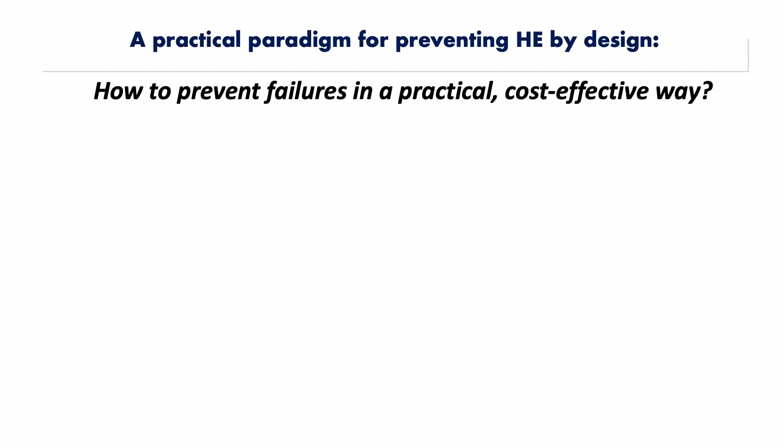And so this is a combination of a few different companies that have been working on this: US Corrosion Services, which I'm representing, and then also Schlumberger and Applied Fracture Mechanics. The point that I want to bring about today is how do we practically take what we're doing in academia and in research and apply it in a way that we can really fundamentally change the way that people are actually using materials. Okay, so I'm going to describe a paradigm and then also talk about what we're doing to implement that in the US.

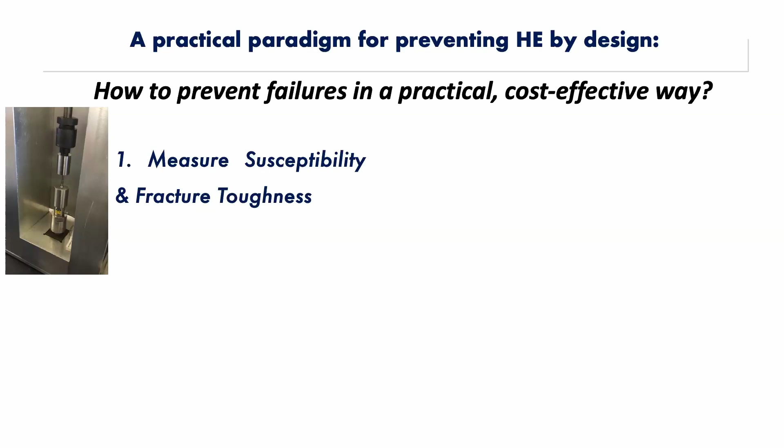So the first thing is measure and understand the susceptibility of your materials and understand the fracture toughness and use fracture toughness related techniques. The second thing is once you've done that, then you can select materials that you know are safe based on the testing that's been performed. And then the last thing, I love this one. This is from ChatGPT, this hilarious little guy.

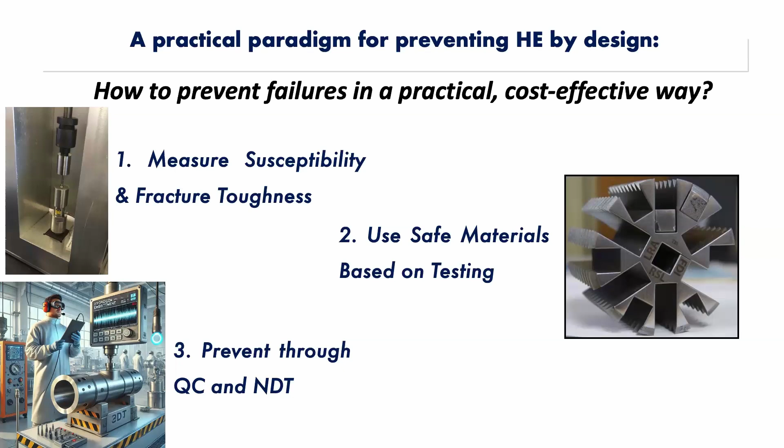And of course, they misspelled embrittlement, is to prevent problems by not only selecting materials that are good, but even when you select a material that you've tested and you know it's good, that doesn't prove that on a batch per batch basis it's good. So the next step is implementing quality control and potentially even non-destructive testing techniques that'll allow us to catch materials before they get out into service.

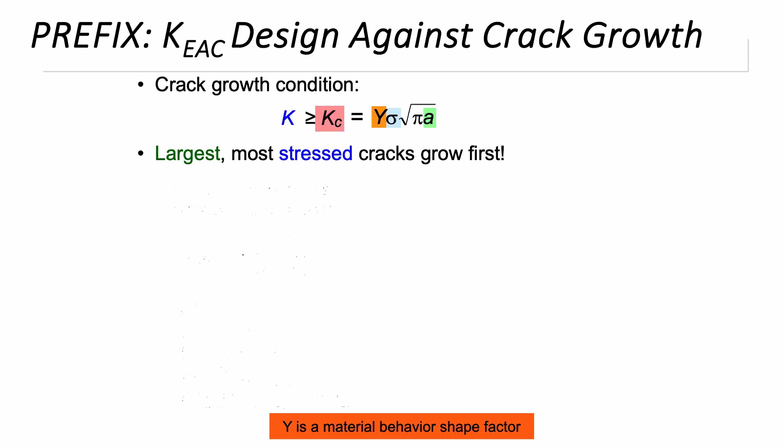So the fundamental idea that lies behind all of this is something that has been used in a lot of different industries, which is the idea of leaking before cracking. Because if you have a leak, you can safely go and prevent it. If you have a large crack that becomes catastrophic, that's when you have much more dangerous failures.

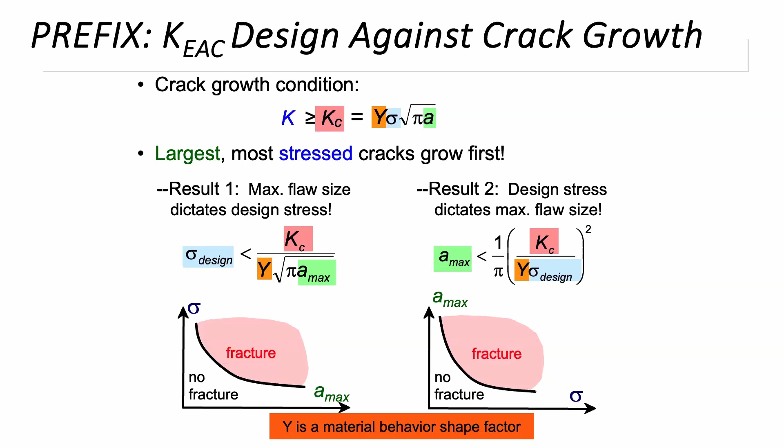Okay, so I'm not going to have time to go into all the details here, but if you're interested, I'm happy to talk about any of the details of these slides. I have 20 to get through in about 12 minutes, so I'm going to cruise pretty quickly through these. But this is the fundamental fracture mechanics that goes behind it to say how you design your materials and pick them so that they will leak instead of cracking.

Okay, and so this approach that we're using right now is similar to what's been used for sour service for a long time. So in the US, we started with MR0175, which is the materials requirement for sour service. That was implemented back in 1975 and then has been steadily added to over the years. And if you've seen it now, it's a massive document compared to back in the day when it only used to be a few pages long. But that's because we've implemented all of the learning and research that people have done in sour service.

And so what's happened is we developed test methods. Those test methods are required for batch testing of every batch of material that's going into critical sour service applications. And then we also have an ISO method that's been developed as a corollary to go along with the method that was developed by previously NACE and now AMPP. And we're doing the exact same thing now for hydrogen embrittlement.

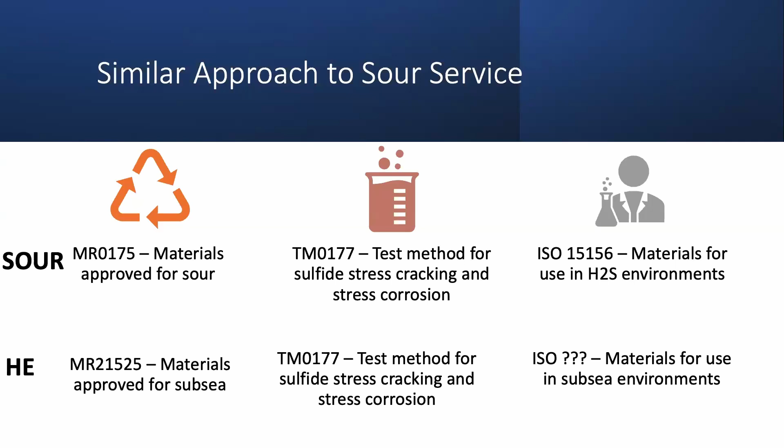And these question marks are here because we haven't developed the ISO method yet. But that's one of the corollaries that I'm probably going to be working with a lot of you on, hopefully, is developing something to go along with what we're making at AMPP. So going back to leak before break, this is the concept.

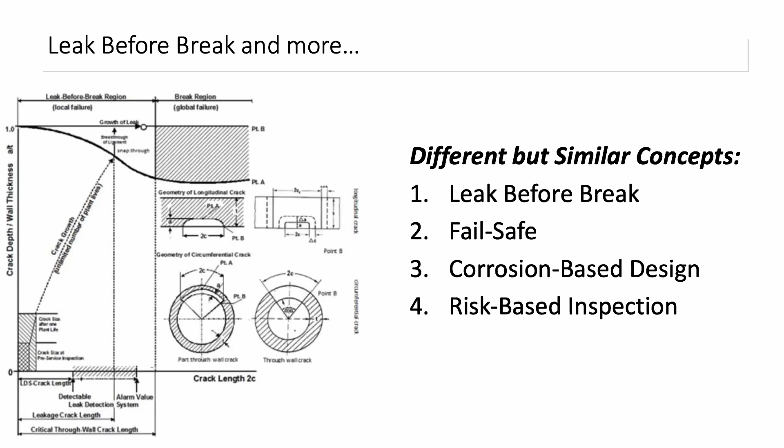So if your crack length is so small that your test method can't find it, that's a problem. And that's part of what we're developing as part of this methodology is test methods with crack detection methods that are small enough to find the problems before they lead to catastrophic failures. So this is the engineering approach.

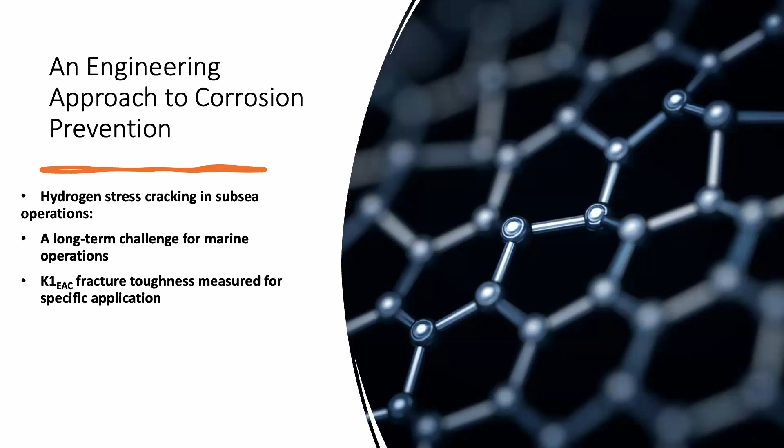In this case, we're specifically focusing on subsea operations. And part of the impetus of that is that there's been a lot of failures related to hydrogen embrittlement in subsea operations. So we're developing a test method that's focused on materials that are typically under cathodic protection and using an EAC type of fracture toughness evaluation. So this is applicable to hydrogen embrittlement, but also equally applicable to a lot of other environmental types of cracking mechanisms.

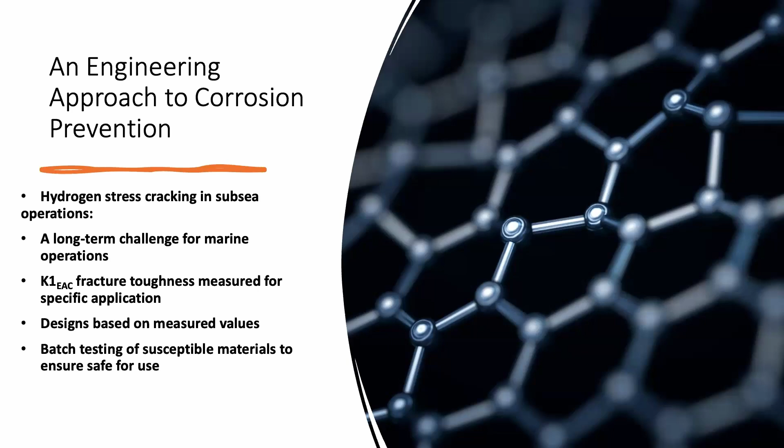Sorry, and the last thing is doing batch testing. So the same kind of methodology that's being used in sour service, where you test every single batch, we're developing something that can be tested quickly enough that you can do the same thing for hydrogen embrittlement.

Okay, so in our case, we're measuring the susceptibility and doing our fracture toughness evaluation using two main methodologies. One is the step loading and the other is SSRT. They both have advantages and disadvantages, but both of them give you a lot of data at a fairly quick time frame. One of the things that we've had to come together to agree on, though, is if you're doing slow strain rate testing, there is definitely a sensitivity of your strain rate. And so we're settling on only specific strain rates so that we can eliminate some of that variability.

Okay, and then once that's done, those will be implemented into the new test method, which is going to be this one, 21546. And then as well, we're going to have material requirements. So as you can imagine, in the first version, we're going to have a limited number of materials that are already known to be relatively safe, and also a methodology for how to test new materials. So for example, if you're making an additive manufactured version of something that we already considered safe, this methodology will allow you to prove that those different additive manufactured materials or new alloys that are developed are capable of doing the same good performance that we expect from other materials that we already know and use.

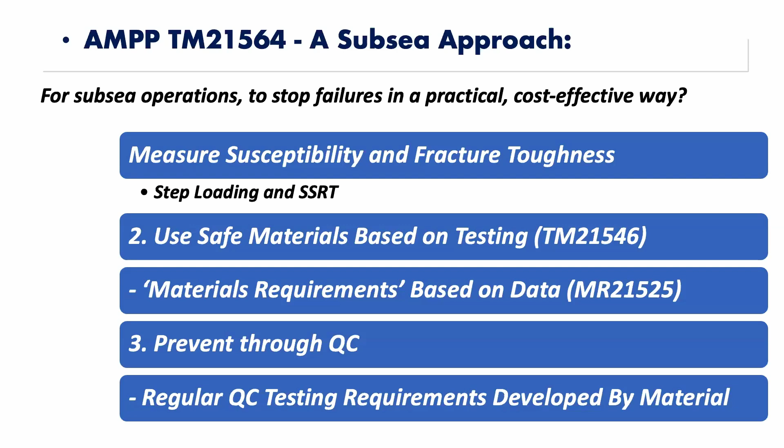Okay, and then all of that will allow us to implement that into the quality control programs that everyone is doing so that when you're buying materials, you can test them quickly. And then the QC testing is going to have requirements that are developed and specific for each of the materials that we're working on.

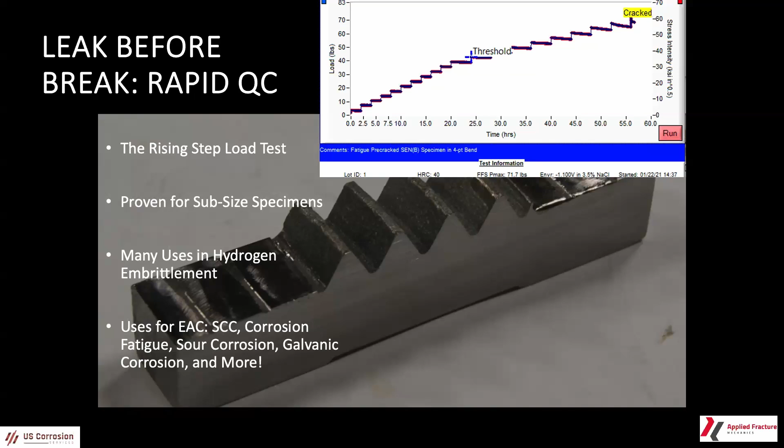So this is an example of the step loading test. This is one that we use a lot, and I personally like it because it's been proven to work really well to correlate between small samples as well as with full-scale samples. And it has a lot of different uses in hydrogen embrittlement. You can use it for quality control testing. You can use it for initial characterization and comparison of alloys. We also use it for failure analysis and forensic investigations.

And here's an example of the difference between this and the old school methodology. So typically in a lot of cases, we're using sustained load testing, and the sustained load test is written into tons of old standards across many different industries. But especially in aerospace, we see sustained load testing being used all the time. I'm personally against that because I feel like with sustained load testing, you're only getting a pass-fail, and it takes quite a while. So in this case, this is an 8-day test.

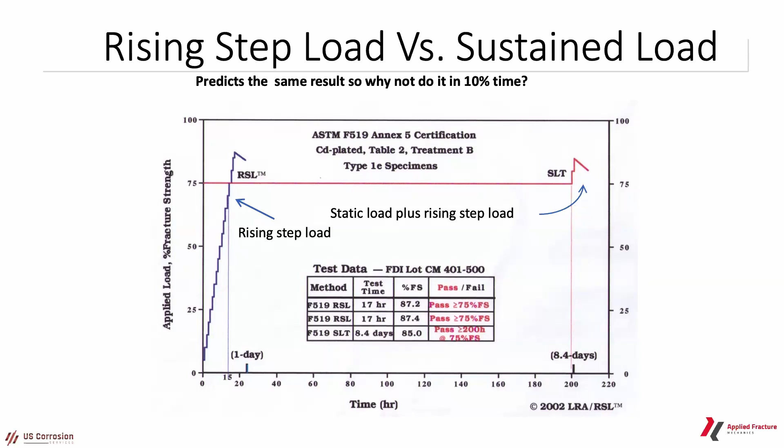But once you include machining, setup, takedown, data analysis, typically you're looking at 2 to 3 weeks to get your test results. And in comparison with the step loading, we can get the same results in 1 day. For softer alloys, this might be 2 days or 4 days, but still it's a pretty quick test. And the other thing is it's quantitative. So wherever you end up finding the threshold, that's an actual number instead of just a pass-fail at 75%.

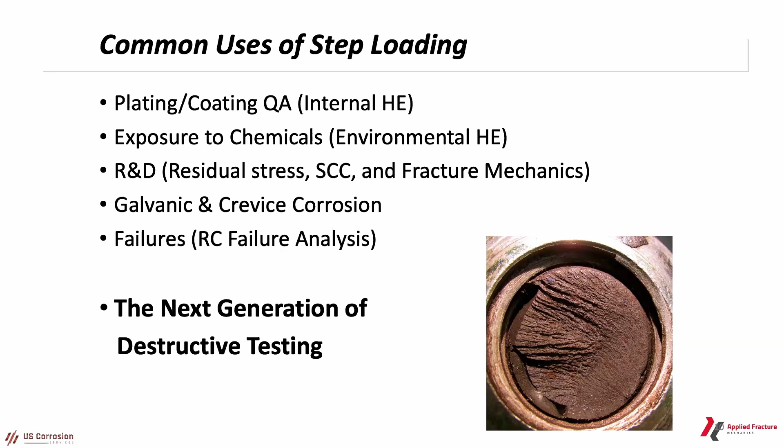Okay, so these are some examples of areas where we're using it in comparison of plating and coatings. That's a critical one because those have a large effect, which I'm about to show you in a minute, as well as for exposure to chemicals. So one of the things that we forget about is that it's not only how the material's produced and what the environment could do to it, but also what kind of chemicals is it exposed to. And one of the big ones that can be problematic is actually cleaning chemicals. They can induce a lot of embrittlement. And then we're also using it for research and development, looking at how hydrogen embrittlement is affected by things like galvanic and crevice corrosion, as well as failure analysis.

So here's an example looking at the OCP of coatings and how this affects their hydrogen embrittlement performance. And what I'm showing you here is kind of a complex chart, but we have 3 different strength levels of materials. Each of these strength levels of materials, these are all steels, were coated with these different coatings. So we have hot dip galvanized, zinc nickel, Dacromet, Magni, flake zinc nickel, titanium cadmium. And then what I'm showing here is the susceptibility ratio.

So the susceptibility ratio is essentially a way of understanding how much the material was affected by embrittlement. And the lower you are, the worse your performance is in embrittlement. So typically the acceptance criteria is set right at 1.2.

And what you can see here is in these high strength materials, there's only a handful of coatings that are actually acceptable. And I would consider all the rest of these to be problematic on something at this high strength level. As you go to more medium strengths, you see a few more of these that start to be close to or in the acceptable range. And then once you drop down to 36 HRC, we actually see that all of these coatings turned out to be acceptable, or at least above the minimum acceptance criteria.

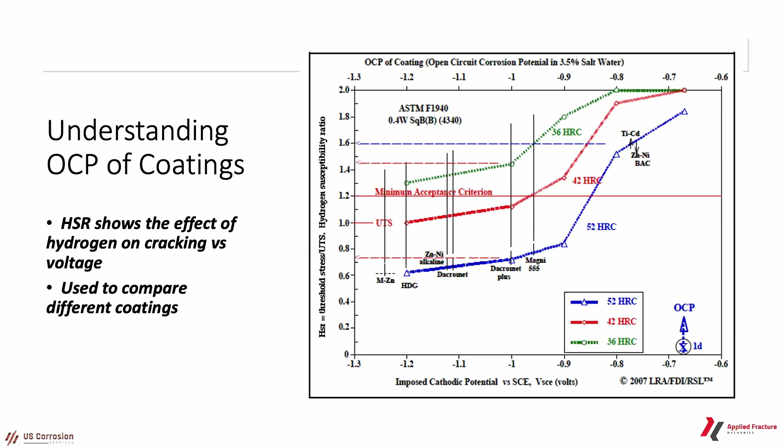So here's an example of looking at the effect of the potential and how different potentials work as well. So as part of this test methodology, we want to understand what happens if you have either an impressed current or if you have anodes. And depending on the current that your material is actually seeing, you have a huge impact on the crack growth rate and essentially on the embrittlement susceptibility.

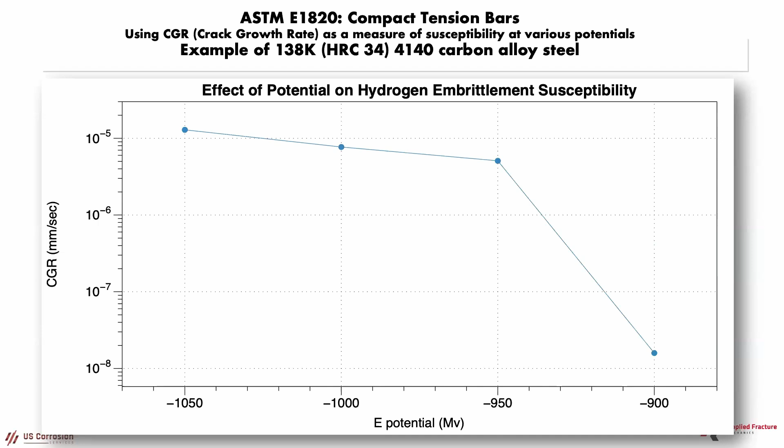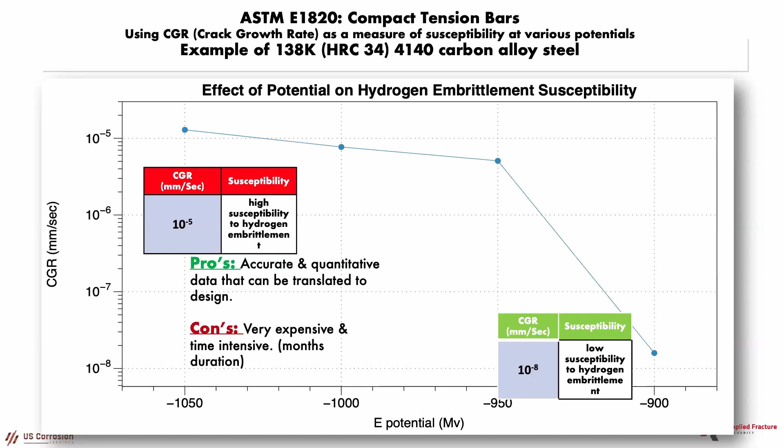Okay, so the advantage of this kind of test is it's very accurate. The disadvantage is these kind of tests can take months to complete. And so in a practical time frame, it's not that helpful for someone who wants to buy material and test it and get it shipped out the door right away. And then in comparison, we can do sort of similar things with the step loading, but in this case, we can complete and get our data from the same kind of alloys within a much shorter period of time. So within a matter of a few days, you can have your results.

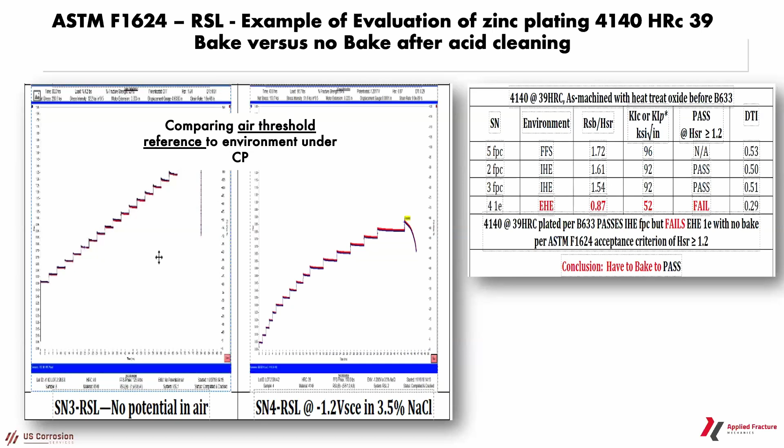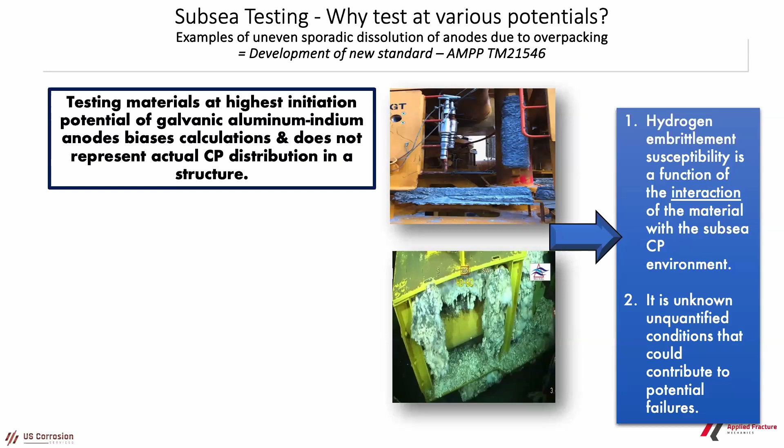And so this is an example of why this testing is important, is when you're looking at cathodic protection, especially when you're using anodes, you find that depending on how the anodes are loaded, you might end up with some anodes that are almost completely depleted after 20 years, other ones that never even activated correctly or have calcareous growth that's causing problems with it. And so that was part of what also pushed us to do more of this research and development.

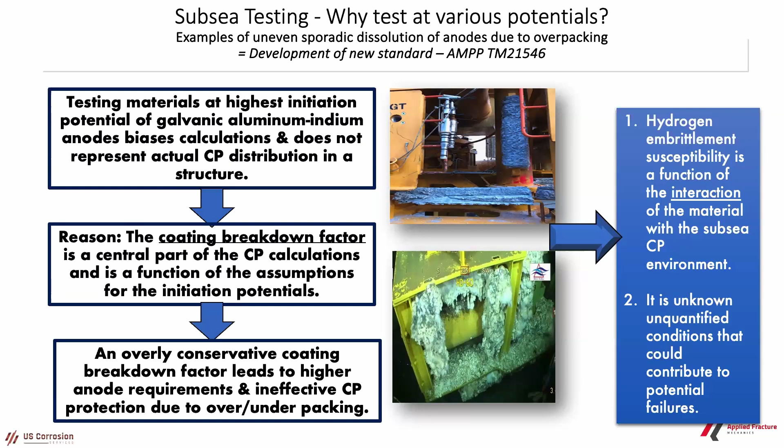So I'm not going to have time to get into it, but we've done a lot of research on the coating breakdown factor, which is one of the effects that allows you to understand how your coatings break down over time. And based on that, you can calculate what the anode loading needs to be. And then I'm going to talk about a few recent advances of things that we've been working on.

So one example is looking at fatigue cracking. One of the things that step loading can be helpful for is determining the initial threshold for fatigue cracking. So instead of just running a bunch of long fatigue tests and then looking at your data and going, okay, here's the point where our threshold is, we're doing step loading with fatigue so that we can determine a threshold and then focus in on that area more with more traditional step fatigue tests after that.

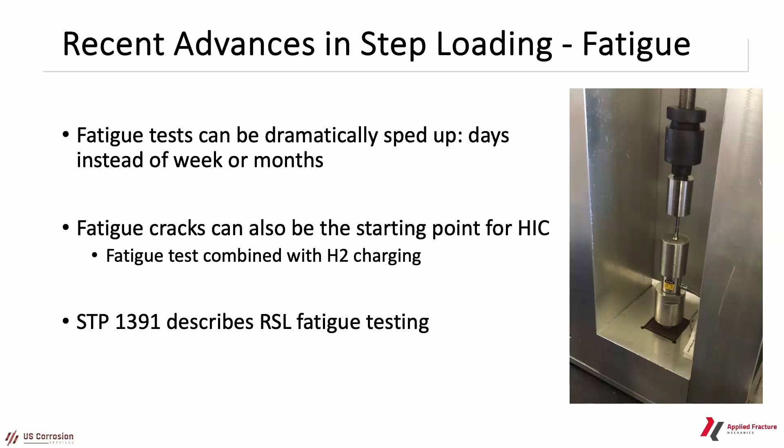Another area that we're working on currently a lot is temperature effects. Well, a lot of the step loading and other hydrogen embrittlement research is done at room temperature. But what we find is for different materials, there's high and low temperature effects that are both interesting and really informative, because in some cases the embrittlement goes away and in other cases it becomes worse.

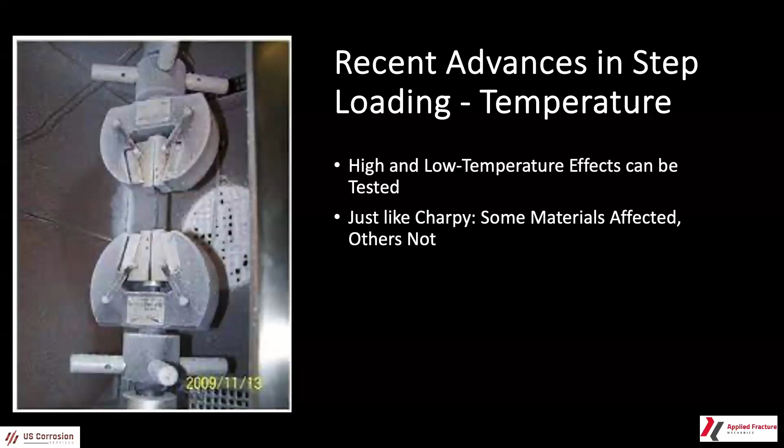And then the last one is the accelerated testing. So it's already an accelerated test, but for quality control purposes, you can determine a material and determine the initial threshold by doing your testing. And then say, for example, that you determine 70% as an acceptable threshold for you. We've been doing research to show that if you do your initial loading correctly, you can jump up to within 10 or 20% of that threshold and then start doing your step loading

and cut down the amount of time substantially further. So what that means is instead of the test taking 20 hours, you might be able to complete it in 6 to 8 hours. And that's perfect for industrial production because you want to be able to have answers the same day or next day. So by the time you're finished making a part, it's ready to go out the door.

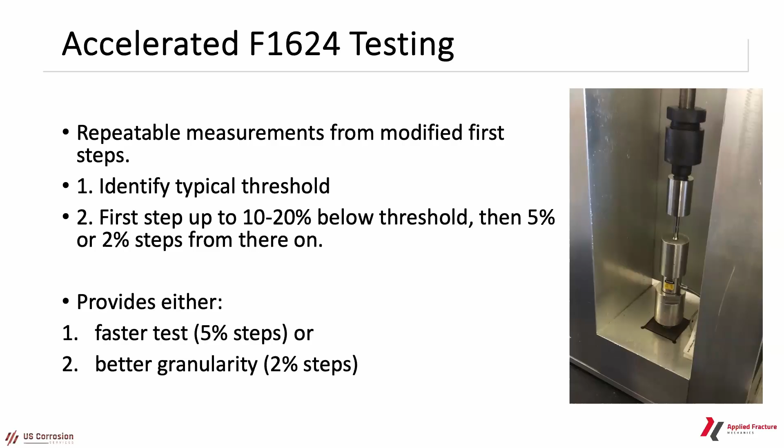And one last example is using step loading for stress corrosion cracking. So it's also very effective at evaluating and measuring and developing thresholds for stress corrosion.

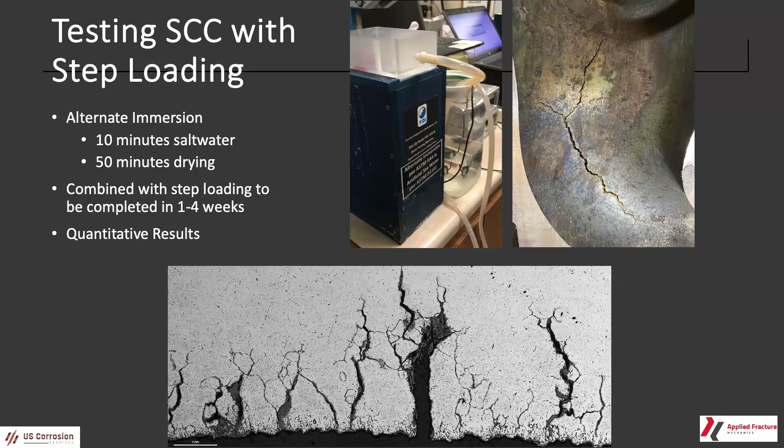And with that, oh, here's the end. So basically what I've tried to present is what I think is a practical way to apply hydrogen embrittlement testing and specifically the step loading test to focus on developing materials and getting them out into service safely in a fast time frame.